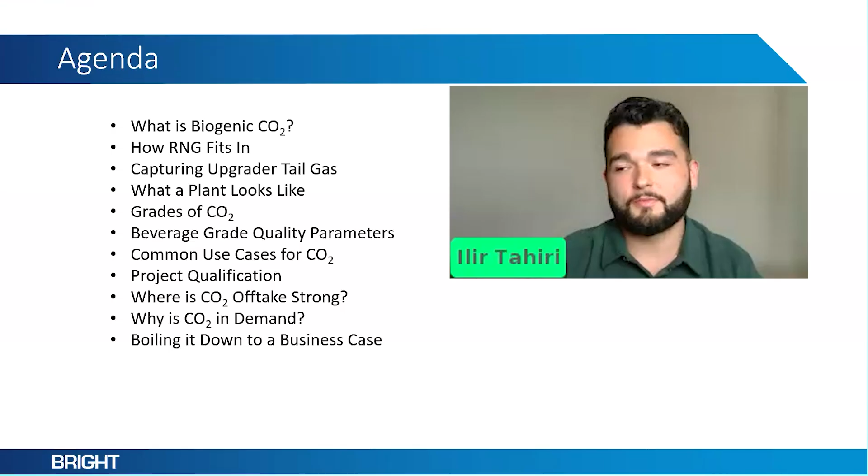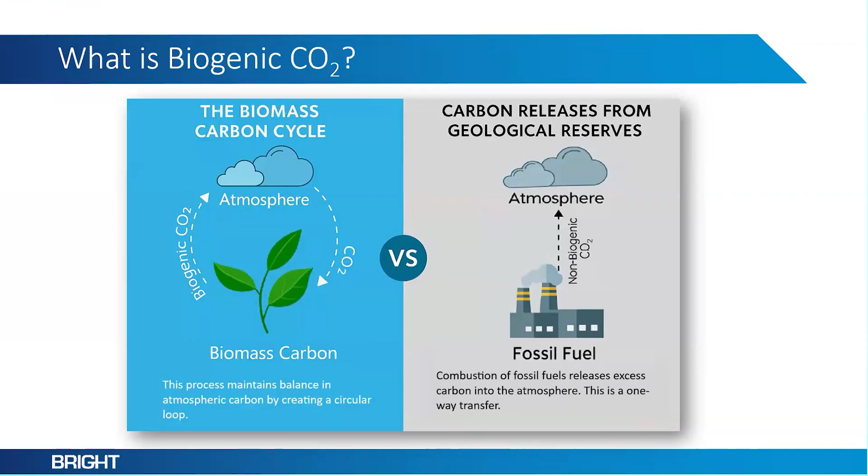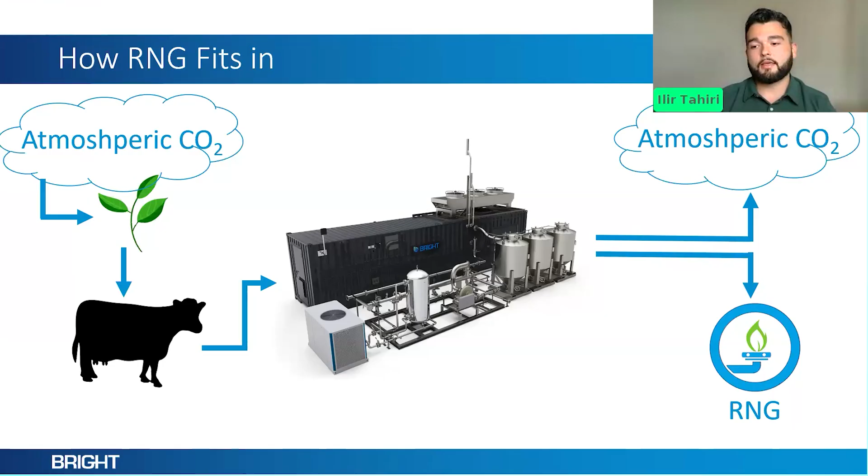Specifically focusing now on how RNG fits into that biogenic CO2 loop. As we all know and love, the providers of biomass primarily backing our industry consume plants and other biosources of energy for themselves. They give us the biomass to digest, and in typical fashion, through a variety of technologies, we can separate the CO2 and methane. That CO2 typically is vented back to atmosphere and the methane used for RNG.

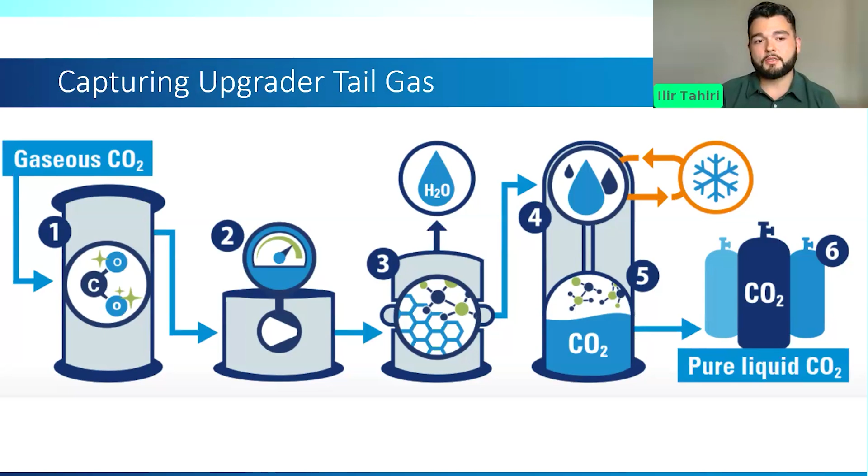Where we can step in is on that vent-to-atmosphere end of the gaseous CO2. The first step here in our generalized PFD, as shown, would be a VOC filter. That's really the first step in providing some certainty around the outlet quality that we target. More on quality and grades to come in a bit.

The second step shown here would be compression. We use an oilless head reciprocating compressor, pretty standard for food and beverage grade CO2 production. The third step is a molecular sieve to dry the gas. Optionally, we can include some gas drying on the front end should there be a need, but particularly with three-stage upgrader tail gas, we only need this singular step here.

Steps 4 and 5 are really where the magic starts to happen. Step 4 is a condenser, and that orange loop on the right is a CO2-based refrigeration system. We use CO2 as a refrigerant as opposed to ammonia or freon to provide an environmentally friendly option, and with regulations consistently changing around freon, we have essentially a future-proof model here. That CO2 refrigeration system is completely divorced from the liquefaction - it's its own standalone piece, as is typical for this type of equipment.

And as that gas charge that is now pressurized cools, droplets will form as the CO₂ condenses. The droplet forms from the outside in, and this process can cause still-gaseous contaminants to be trapped or entrained within the droplet.

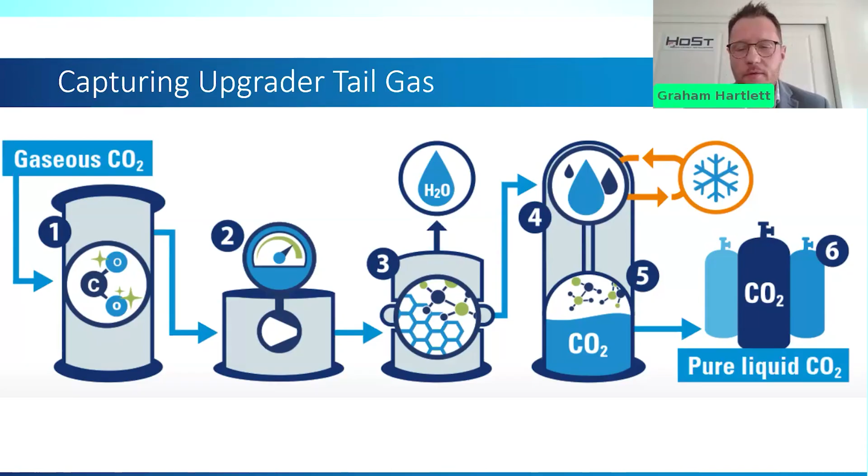A second question quickly: what is the CO₂ concentration of the exhaust gas coming out of the upgrader? And in general, what is the concentration of the various impurities you see from an upgrader?

Good question. For the case of a Bright upgrader, we'll see greater than 99% pure CO₂ as our tail gas stream. Other upgrader types could have 3, 5, 7, sometimes 10% methane slip going into that tail gas stream.

Another good note to make here, as I discussed earlier on steps 4 and 5, that carrier gaseous CO₂—carrying those contaminants inclusive of methane—doesn't have to just be vented to atmosphere. It's very typical that it would be recycled upstream into the upgrading process, so virtually all of your methane slip would be recaptured in that loop, closing it off.

Otherwise, it'll depend on the upgrading technology in terms of how much oxygen goes through with the CO₂, nitrogen, et cetera. In our case, very small amounts, trace amounts, primarily a 99+% pure CO₂ stream.

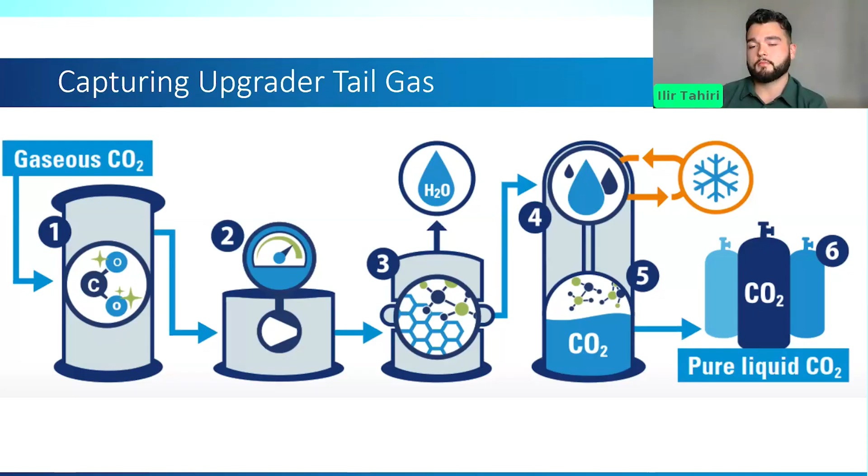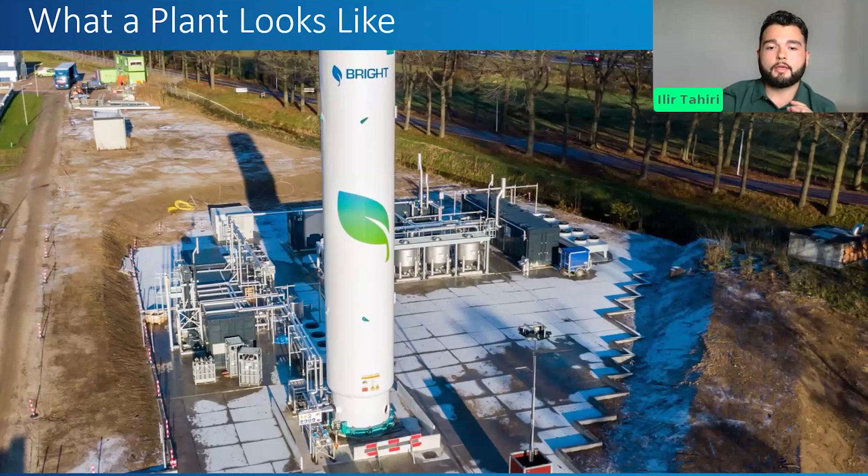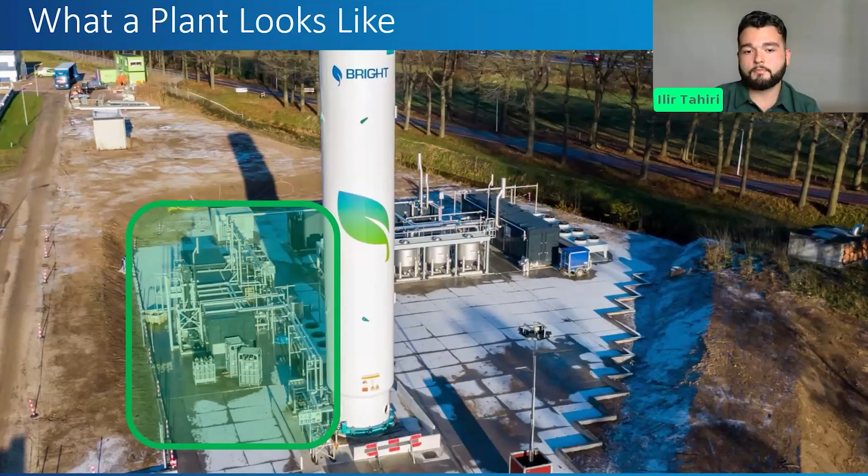Another site image here. This one's a better look into seeing exactly what the process flow looks like, relating that generalized PFD to an actual installation, just so you can get a better grip of what's going on.

That first step, as I mentioned, the VOC filter, that's on the inlet side. That gets piped into the container for step 2, which would be the compressor. Of course, you can't see it now, but right beyond where the wall is, where the 2 is, is the location of that compressor. And then 3, the molecular sieve.

It's a little bit difficult because it's black here, but you see the condenser and the distillation column. This would be your steps 4 and 5, along with the reboiler. And then exiting the system to the storage tanks are step 6, our storage.

And we use 2 storage vessels here, and we have a truck filling station here that can select between which tank is getting emptied, etc.

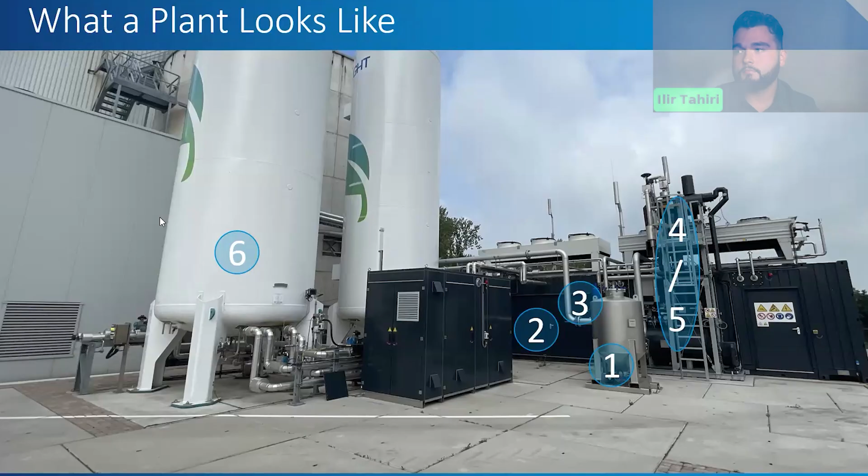Onto the various grades of CO2. There are... Yeah, sorry, just as these questions come in, another question. Sure, should I quick go back?

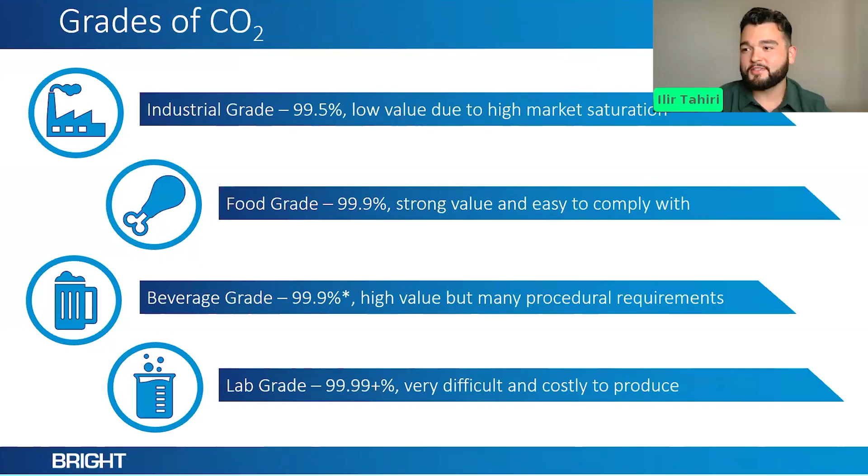What is the flow capacity of the system in the photo with the numbers? I don't know if we have that on hand.

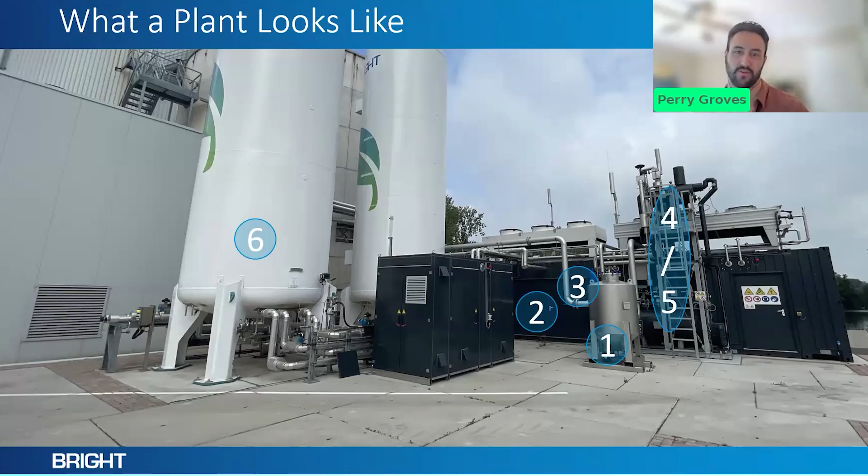And then the second question is, where is the CO2 facility typically located relative to the RNG plant? Are they on the same location? Yeah, so in typical fashion, they'll be installed next to one another as close as possible.

It's a little bit difficult to discern here, but off to the left of the screen, essentially, if you're standing in the spot and you turn left at 90 degrees, you'd be looking at our upgrading system. So 50 feet from one another, essentially as closely located as your site allows.

And then you just pipe up your tail gas stream into the inlet of the step 1 VOC filter, and the rest is history. In terms of storage location, in this example, it's quite close as well as the previous example, but storage doesn't have to be right next to the equipment if the site design doesn't allow.

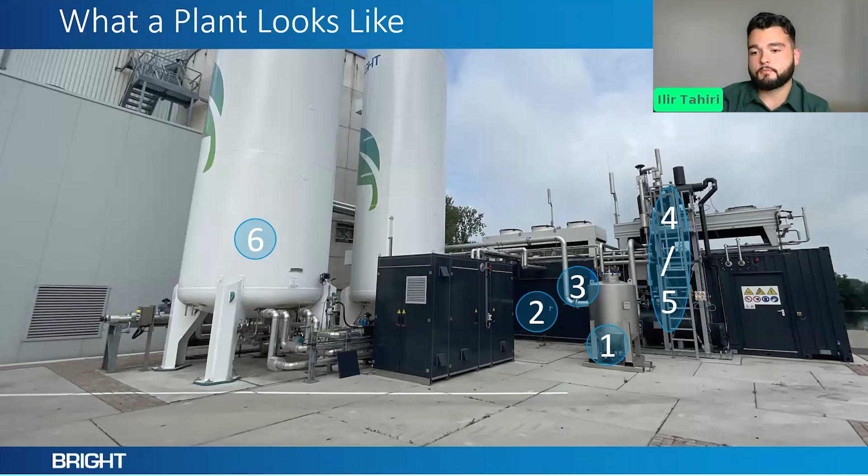Returning to the grades of CO2, there are numerous grades of CO2. I'll touch on four here, pertinent for this discussion, I would say. The first one being industrial grade. It's typically 99.5% pure. Some sources dictate that it's 99% pure, which coincidentally enough is in line with the tail gas of a three-stage upgrader.

But due to the high market saturation and the low cost of production from other sectors, you have kind of a low value tied to this industrial grade CO2, though there is ample amount of offtake in the industry. So if you're negotiating a CO2 project, it could be a viable source of offtake for you, but probably not a high flyer on anybody's radar.

The second one, food grade, 99.9% pure or better. Very strong value here as there's less market saturation and it's relatively easy to comply with. It's molecular quality at the end of the day, as is not the case with beverage grade, also 99.9% pure. Very high value, brings very good premiums in industry, but there are many procedural requirements, and I can touch on those at a high level on the next slide.

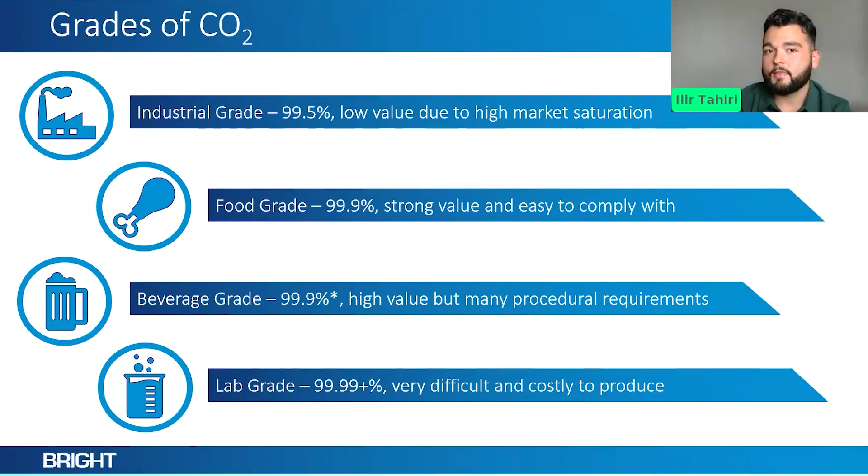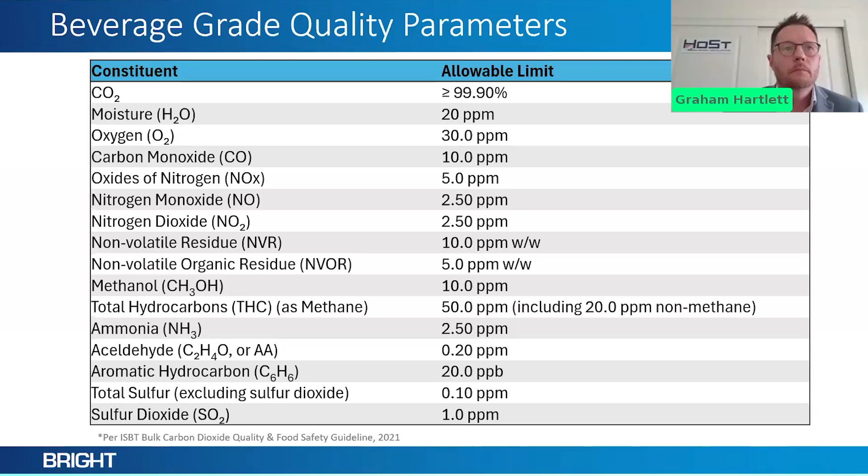Here we have the beverage grade quality parameters. Outlined here are just the molecular requisites. Beyond this list, there's also some sensory requisites. It has to be odorless, tasteless, and clear, no appearance of color or turbidity in water. Otherwise, the molecular quality here would qualify for food grade as well.

So it's really the kind of regulatory side of it that would be the barrier between food and beverage grade offtake. If you see a CO2 system in market advertising beverage grade, it's almost always technically beverage grade molecular quality. There should be a clear delineation of that in terms of discussion.

Beverage grade itself requires some other hurdles such as a redundant storage system. Essentially, you need to have at minimum 2 vessels. That way, if one doesn't meet the quality spec, the other one can have offtake, and that CO2 can be non-contaminated, and the up-to-spec output product can go into the non-contaminated vessel.

Otherwise, you have to do a fingerprint of the feedstock. There's some continuous and periodic analysis that has to be accounted for. So a significant amount of steps between food and beverage grade in terms of commercializing and bringing it to market.

Although the ISBT Technical Committee for Beverage Gases is currently drafting guidelines and requirements for bringing biogenic CO2, and in broader terms, CO2 from alternative sources, to market as a beverage product. So be on the lookout for some developments coming from that group over the next year.

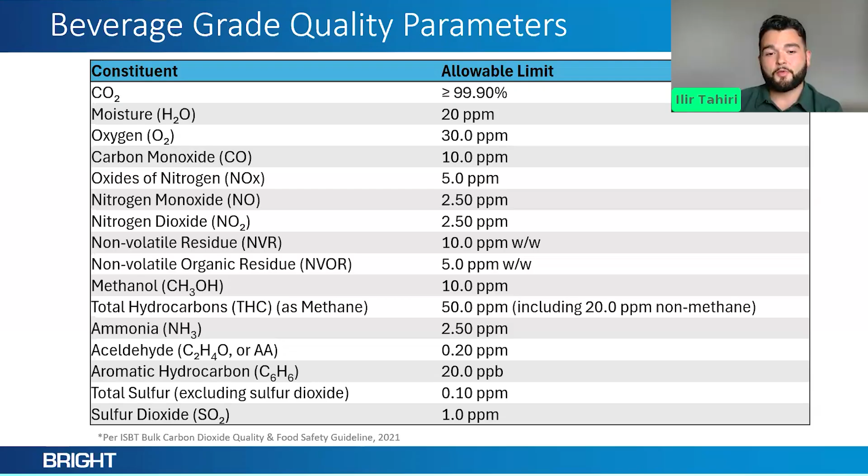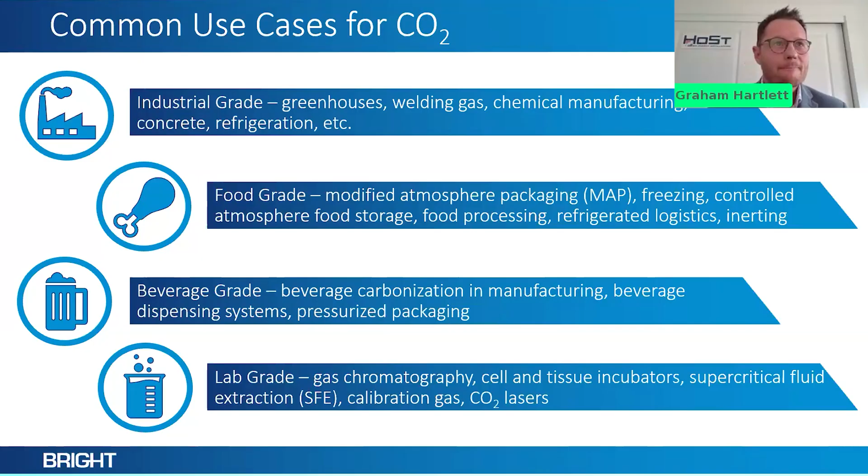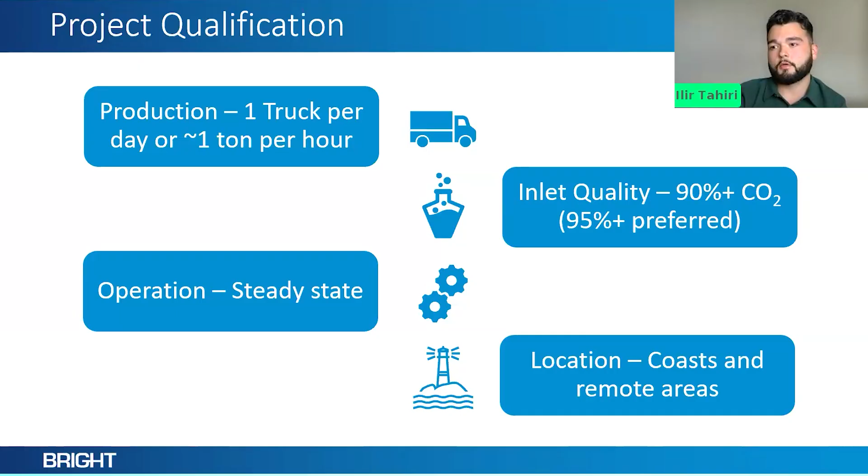So anything north of that would be good. My typical rule of thumb for that conversion: take your SCFM of biogas and convert it to normal cubic meters per hour — that's roughly how many kilograms per hour of CO2 you'll produce. For example, 1,500 SCFM of biogas converts roughly to 2,500 normal cubic meters, so you'd typically expect around 2,000 to 2,500 kilograms per hour of CO2 produced from that.

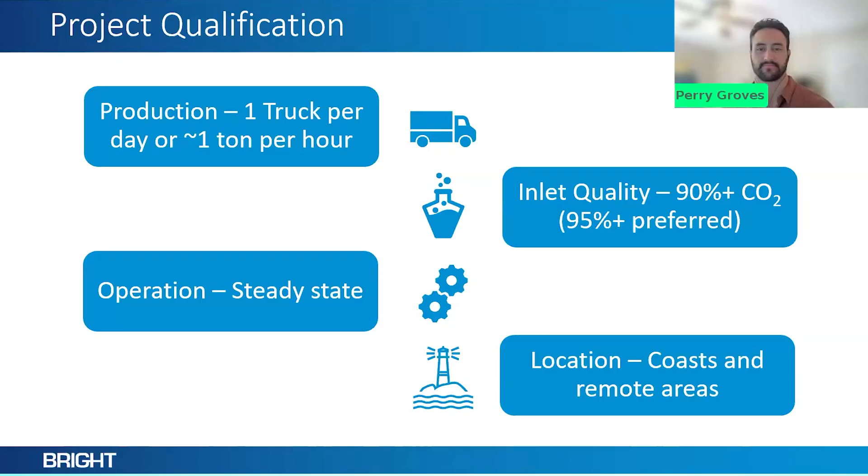By the time it makes it to the East Coast or West Coast, the value of that CO2 is baked into the cost from a centralized supplier, and that cost is primarily built from logistical cost. So distance is the main factor, and the central US is kind of the epicenter for CO2 production.

Remote areas like Alaska and Hawaii carry significant premiums because you have to truck to a port, transport by boat, then truck to site — Puerto Rico also included there. It can become a very attractive project, but projects in those areas are pretty scarce. So unfortunately, I don't think we're all going to be able to jump the gun and develop a project in Hawaii or Puerto Rico and take a nice vacation to visit site. But anything on the coast, or approaching the coast, is really where you'll find high value offtake for your biogenic CO2.

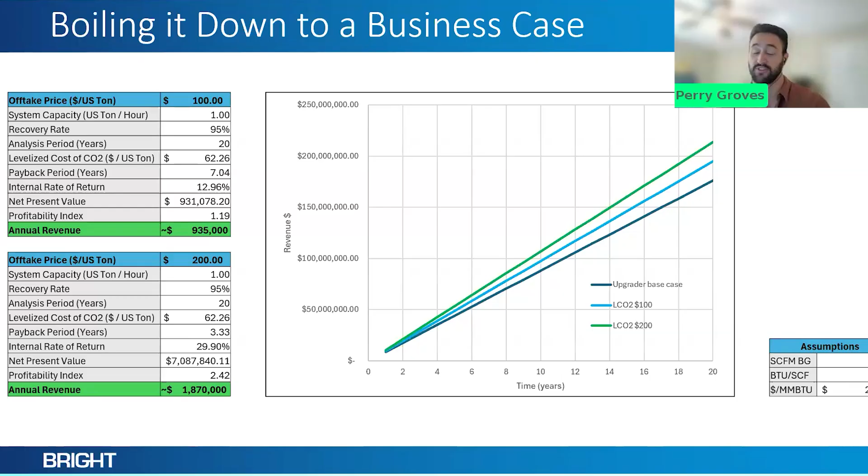Because it's a cryogenic distillation process, that's dependent upon the inlet quality of the CO2 coming in. For our situations, we typically see streams of 90% or higher, ideally 95%. But coming from our upgrader, since that's a relatively pure stream of CO2 at about 99% coming into our liquefaction system, we'll see recovery rates as high, if not higher than 95% for a stream like that example. Very high recovery rates. And if you take that non-condensable gas stream from this process and recycle it back to the digester or upstream process, you can also recover that methane and also that CO2 to reprocess and recapture as well.

And a question about the subsequent webinars that was alluded to: what is webinar 2 and 3 about?

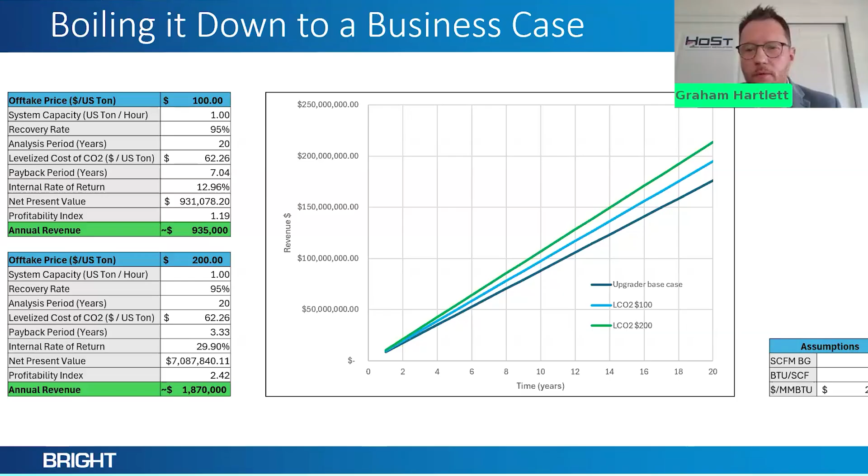Sorry, Graham, what was the question? I just wanted to get that out there. You mentioned some other webinars you're planning in the series, because the topic is quite big and there's lots of questions. So just a reminder, what is webinar 2 and 3?

Webinar 2 and 3 will be date TBD for the time being. Webinar 2 will focus on a deep dive into the tech, getting granular with the nuts and bolts of our technology, as well as the technologies in industry that make CO2 liquefaction possible, and then talking specifically about what steps are needed to adapt it to a PSA, amine system, or landfill - exploring those topics we've touched on already in significantly greater depth.

Webinar 3 will focus on what it actually looks like, discussing more of the steps towards commercializing the product and trying to inform whoever's interested on what the semantics look like in bringing this product to market and building it into their portfolio.